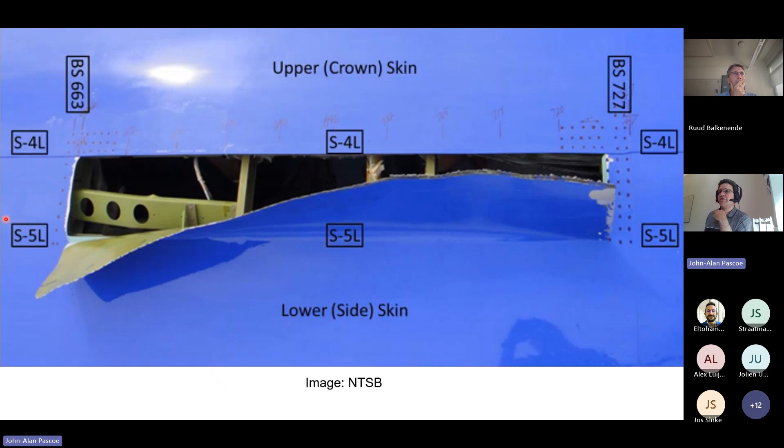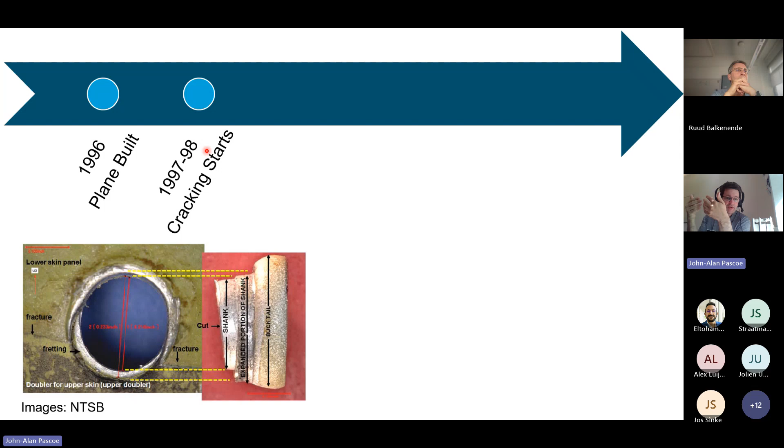The stresses were not distributed correctly, and so very soon, about a year or so after the plane was built, the material started to crack due to these increased stresses. We have a phenomenon called fatigue. If we have repeated loading on a piece of material, that can start to damage, and that damage grows over time. It's quite a slow process because it took another 12, 13 years before finally the crack got large enough that the remaining material could no longer carry the loads, and this entire piece of fuselage just unzipped and let out all the air.

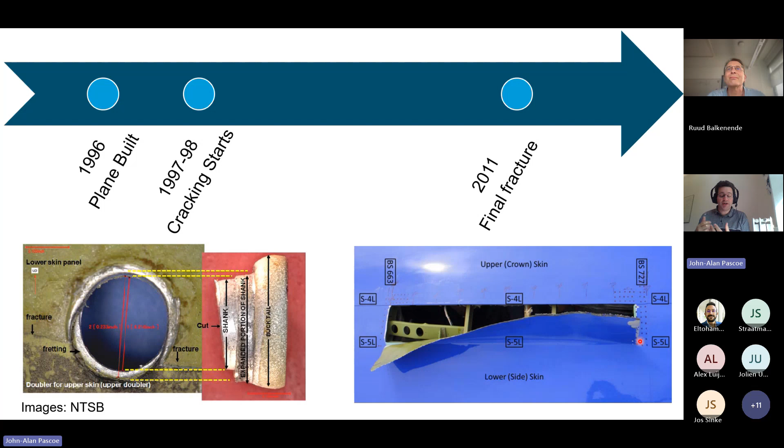So obviously this is something we want to avoid, this phenomenon of fatigue. It can happen if you incorrectly manufacture your plane, but even if you perfectly manufacture your plane, you could still have issues with fatigue. So one thing is, if you want to have a plane that lasts long enough, or lasts forever, you need to design it against fatigue. One thing you could do is characterize the fatigue properties of your material.

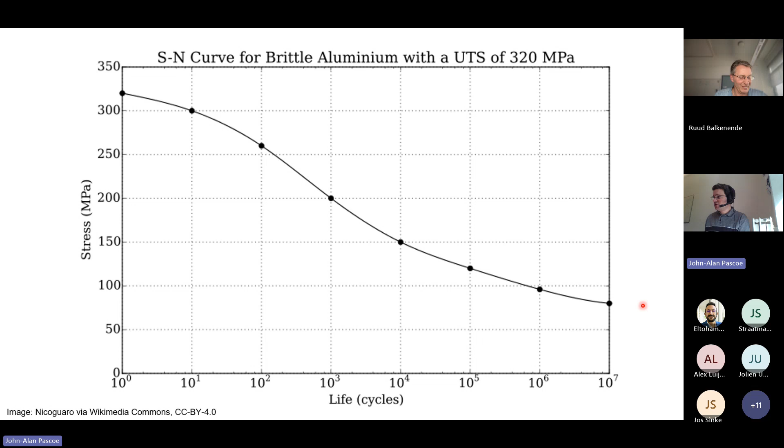So if you look at this curve, it starts over here. This is what we call the tensile strength of the material, where the material fails immediately, after even one cycle. But you see there's also kind of an asymptotic behavior. So you could say, okay, that's great, we seem to have this kind of lower limit here. So if we just keep our stresses in our material below this level, then we would have an infinite life, and we could just use our plane forever.

So great, why don't we do that? Well, there's an issue. If we want to have an infinite life, we need to keep our stress quite low. And what does keeping stress low mean? How do we achieve that? It means we need to use more material. If we have more material, we can distribute the loads over more material, and that means the amount of stress, the load per unit of material, is less. So the material is less highly loaded, and therefore we have an infinite life.

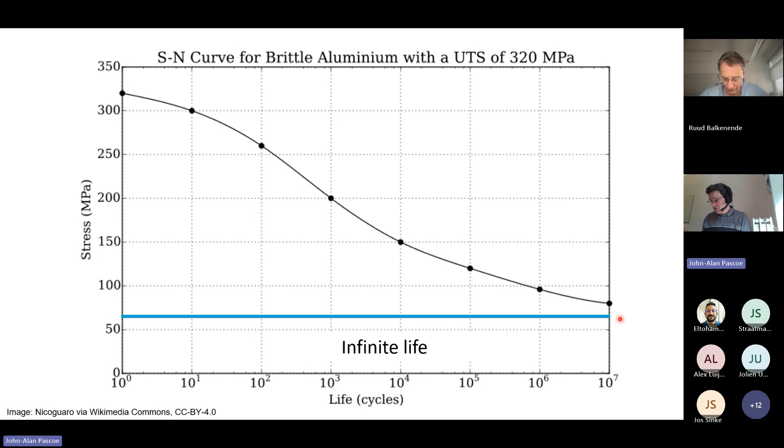So to get an infinite life, we need to use a lot of material. And to use a lot of material means a lot of weight that we have to add to our structure. Why is that a problem? Well, that is because of physics.

I'm going to have some equations here for those of you who like equations. For those of you who don't, feel free to zone out for a minute and I'll explain the key things you need to take from the equations at the end.

If we look at an aircraft in flight, there are four fundamental forces. There's thrust moving the plane forward, opposed by drag. Thrust we get at the moment by burning fossil fuels. The plane is kept up by lift, which counteracts the weight. If we're flying straight and level, lift has to equal weight to keep everything in balance according to Newton's laws.

For the lift, we have the following equation. The lift depends on the lift coefficient, which depends on the design of the wing and the angle at which the wing is with respect to the air. It depends on the air density, which is a function of altitude, the speed we're flying at, and the surface area of the wing.

If we have a certain wing design and we're flying at a certain speed, the pilot will adjust the angle of the plane to get the right lift coefficient to keep everything in balance. What is the right lift coefficient? You can solve this equation. The key thing to remember is, if we're flying at a certain height and speed with a certain plane with a certain wing area, the lift coefficient will depend on the weight. So the heavier the plane, the higher the lift coefficient.

The reason that's a problem is because we also have drag. Drag is what causes us to burn fuel, because if there was no drag, we wouldn't have to burn fuel to go forward. The drag has a similar equation to lift, but now we have this value of CD, the so-called drag coefficient. If we look at the equation, the drag coefficient is a function of the lift coefficient. One aspect of drag is the parasitic drag, which is always there. Another aspect is the induced drag, which is a byproduct of the lift we need to generate.

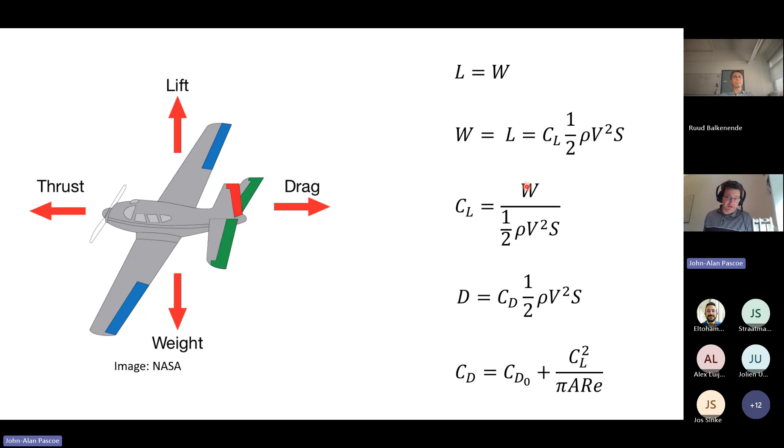So the drag coefficient is a function of the lift coefficient, but the lift coefficient is a function of the weight. The key point to remember is: if we have more weight, we need more lift. If we need more lift, we get more drag. And if we have more drag, we need to supply more energy to get from A to B. So the heavier the plane, the more energy it takes to get from A to B. And that means we're generating more fossil fuel emissions and more environmental impact from extracting whatever we're using as fuel. So we want to avoid weight from a cost point of view, but also environmental impact - a lighter aircraft, all else being equal, is more environmentally friendly.

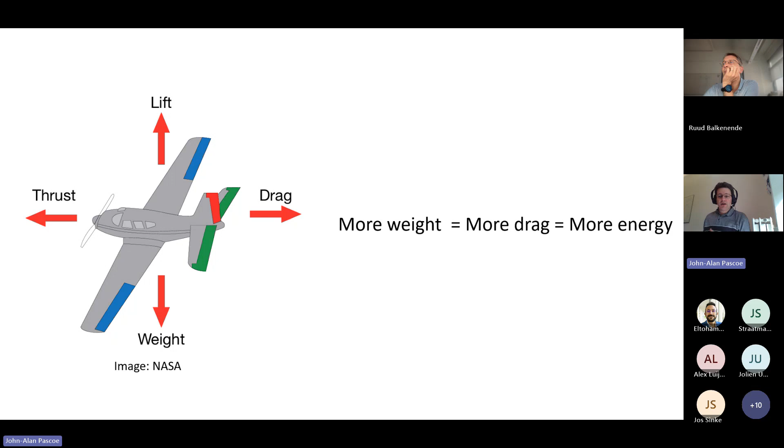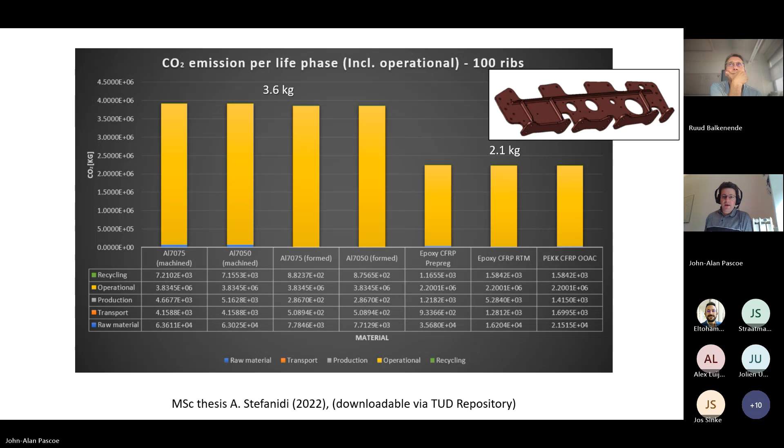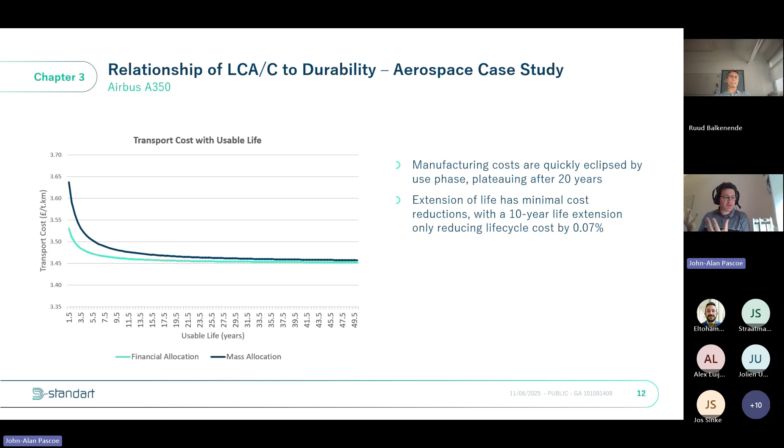Then you might think, okay, that's now where we're burning fossil fuels, but people are working hard at generating alternative fuels, zero emission fuels. In future we may fly on electricity, sustainable aviation fuels, or liquid hydrogen - they don't emit CO2. Then the story will change, because the operational impact will be low since there's no CO2. So should we then really focus on the manufacturing? Or maybe it's okay to be a bit heavier if that gives us less manufacturing impact. Well, that would be great if it were true.

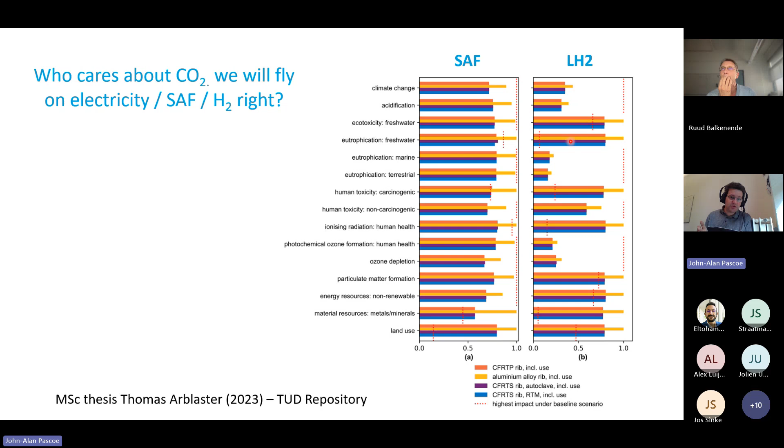On the left, you see if we fly on sustainable aviation fuels. On the right, if we fly on liquid hydrogen. And the key thing is that this yellow bar is still higher, right? So even so, the heavier solution still has in nearly all categories a higher impact than the lighter solution. So even if we fly on sustainable aviation fuels or liquid hydrogen, the life cycle impact is still dominated by the use phase, and the key driver for how much impact we have during the use phase is the mass. So even if we switch away from fossil fuels, from a life cycle point of view, having a lower mass is better, even at the cost of an increased manufacturing impact.

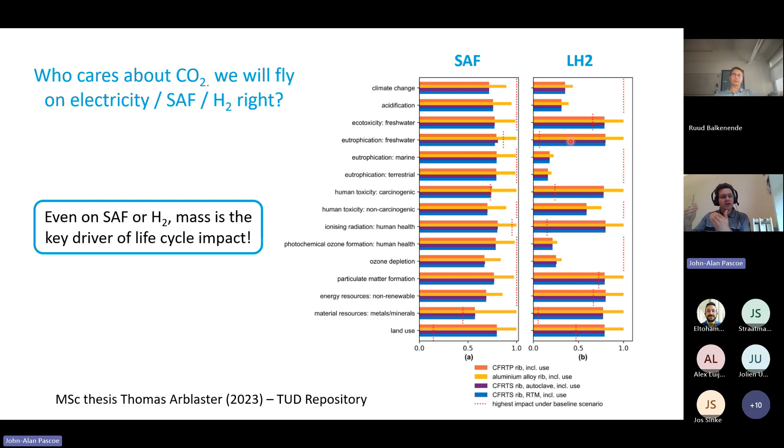So flipping that around, if we can reduce the manufacturing impact, or increase the recyclability, but at the cost of extra mass, that is probably not worth it for an aircraft. Which is very different from many other product categories where you say, well, maybe we can accept a little bit more operational impact if it makes recyclability better. But in aircraft, really, the operational impact is paramount.

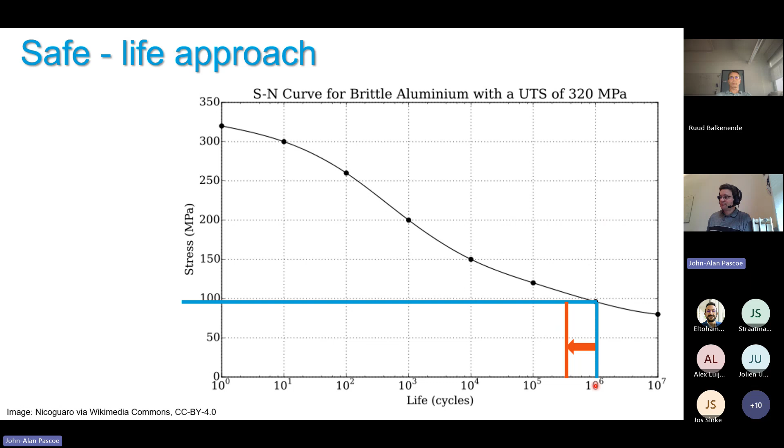So what do we do in an aircraft, right? To keep that mass down, we accept a limited lifetime. Going all the way to infinite life is not good - it would be too heavy. We can reduce the weight if we allow a bit more stress. If we say, well, let's allow 100 megapascals in this example, then we will have a fixed lifetime. We divide that by 3, and then we get what's called the safe life, which essentially becomes a use-by date for our aircraft or our part.

We say, okay, our plane, after so many flights, you scrap it. We can't keep using it because we cannot guarantee that it is safe, that it will not fail due to fatigue. We just scrap it. So there's a trade-off between having a lower operational cost or impact because we now have a lighter plane, so we can fly more efficiently, but at the cost of now having a limited lifetime.

Now, one issue with this approach is that if you look at this graph, it tells you nothing about what happens to the material during this lifetime. It just tells you at this point we get failure, but we don't know what happens before. And we know we have a large scatter, a large uncertainty, but we cannot with this information tell if we can keep using the plane or not. We cannot inspect the plane and say, oh, this is about to fail, or we can safely keep flying. So actually in aviation, for many cases, we've switched to a different approach, the so-called damage tolerance approach.

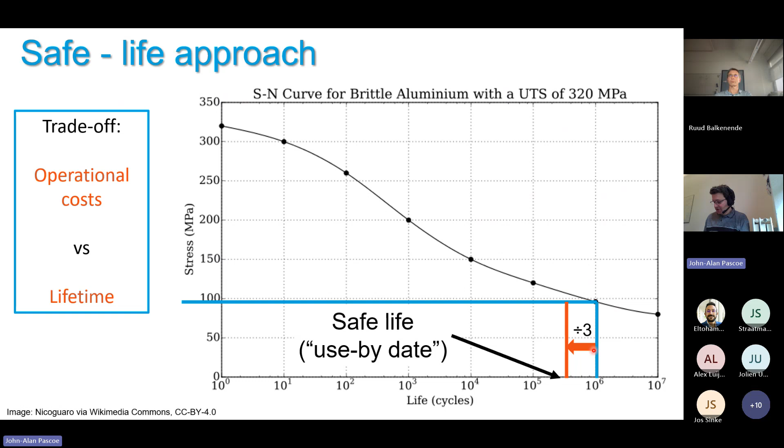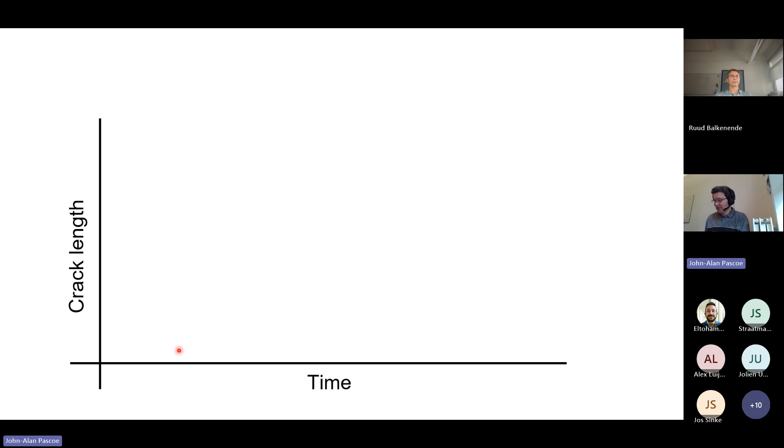What is the idea there? Well, fatigue, as I explained to you, is a result of cracks that slowly grow over time. And so if we can predict or measure how the cracks will grow over time, then we can say, well, at a certain point in time, the cracks are large enough to be detectable. We can find them during an inspection. And sometime later, the cracks will become so large that the plane can no longer carry the required loads - that the residual strength of the plane is too low, and then our structure fails.

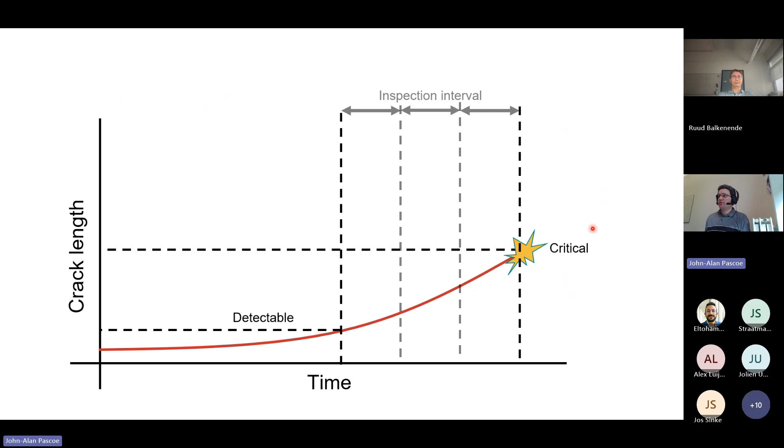Or at least there's a danger of failing. So that means we have a certain time window between when we can find a crack and when the crack is really a safety issue. If we divide that up into typically 3 inspection intervals, we can say, well, if we inspect the plane every so often, then we have 3 chances to find the crack. So even if one time the inspections on Friday afternoon and the inspector was rushed because he or she wanted to get home early, still there are 2 more chances to find the crack, and the crack will be larger.

So in this way, we can ensure that we always find a crack before it's critical. So instead of a use-by date, we go to an inspect-by date. It's a bit like what they now advocate in the Netherlands: if the use-by date on your milk or yogurt has passed, don't throw it away immediately, but smell or carefully taste or have a look—maybe it's still good.

Same with the plane. We can inspect. If we don't find any cracks, we can assume the plane is still good. We can keep flying until the next inspection, and potentially keep flying forever—or at least until we find cracks, and then we need to take some action. So that's the so-called damage tolerance approach.

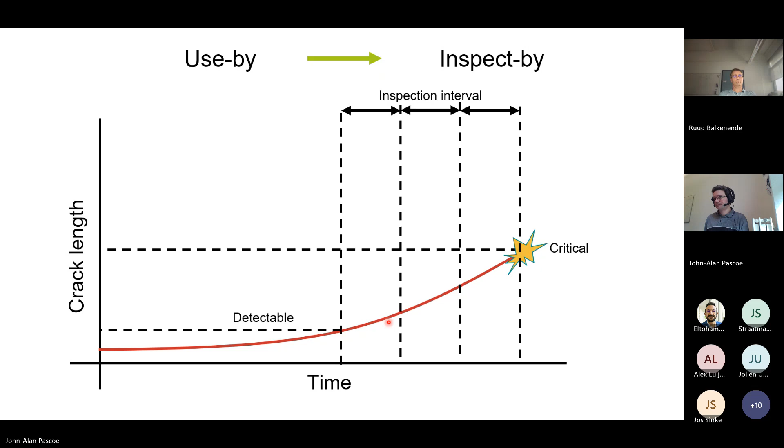Unfortunately, this also has its limitations, as shown by this very famous incident, the Aloha Airlines accident in 1988. A Boeing 737—and even those of you not so familiar with aircraft may realize there's a part missing over here. This is in fact a large chunk of the fuselage that flew off during the flight.

Unfortunately, one person did not survive. There was a flight attendant walking through the cabin at the time who got sucked overboard. Everybody else was in their seat with their seatbelt fastened, and so they managed to survive safely.

This was investigated to understand what happened, and it was found this was a very heavily used aircraft—35,000 flight hours over almost 90,000 flights, because it was used for flying between islands in Hawaii, so very short flights, lots of flights in a short amount of time, in a very corrosive environment—warm, humid, salty. It was found there was a failure of a longitudinal riveted and bonded lap joint.

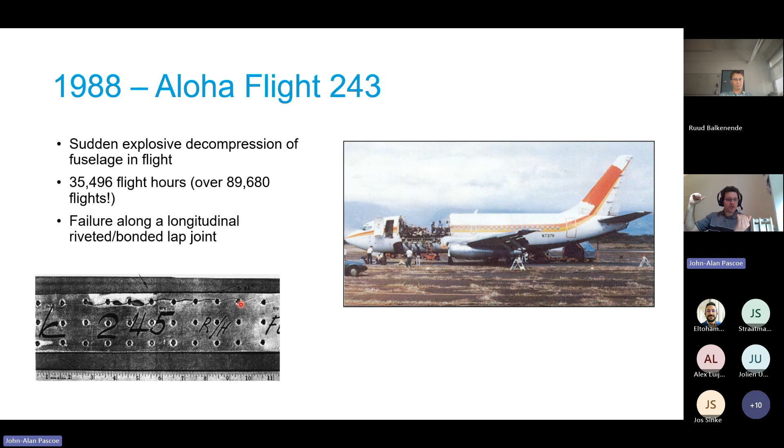Along this fuselage barrel, it's made of overlapping panels. At one of the joints where the panels overlapped, they found a collection of cracks joining together all these rivet holes and then just unzipping the whole joint. As people investigated further, they realized there's this phenomenon called multiple site damage, MSD.

What happens is you have these small cracks, but they don't grow independent from each other. If you have a location with multiple holes, you might have multiple cracks starting, one at each hole. But as they grow towards each other, they start influencing each other, interacting, and can even link up. So you can go from two relatively short cracks to one. Here you have a crack going from here to here, relatively short. But at the next stage, you have a crack going from here to here, all in one go.

Your crack very rapidly gets much larger. That means this damage tolerance approach doesn't work, because the small crack may be too small to detect easily, but as soon as it links up, you suddenly have this jump in crack length. You cannot inspect in that small time interval before the crack links up. So that limits the damage tolerance approach.

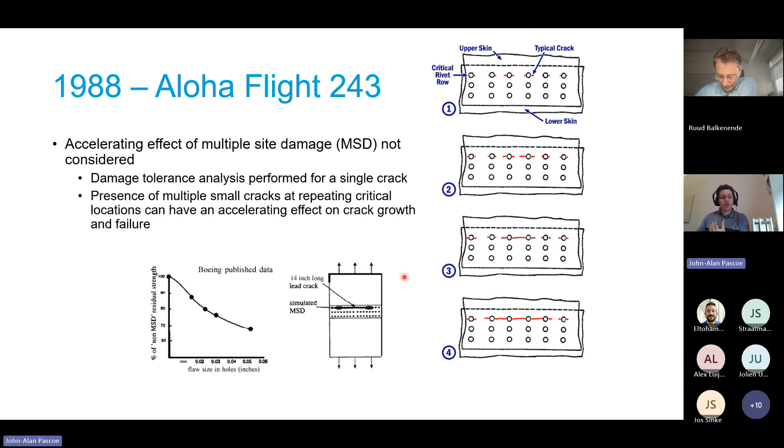Therefore, if you look in the regulations—this is one of the European regulations—there's a section on damage tolerance and fatigue evaluation in structures. One aspect states that a limit of validity must be established that corresponds to the period of time for which it has been demonstrated, by full-scale fatigue test evidence, that widespread fatigue damage will not occur in the airplane structure.

A full-scale fatigue test means literally building an entire plane, putting it in a huge test setup, applying loads, and seeing when it fails. Based on that, you establish a limit of validity. This means you have a certain amount of evidence from your full-scale fatigue test that you do not have to worry about widespread fatigue damage or multiple site damage for a certain period of time. That evidence has a limit of validity.

Beyond that, the evidence is no longer valid—you do not know what will happen. And what that means is that when you reach the limit of validity of your evidence, you have to stop flying. It is not allowed by the regulations to continue flying after the end of the limit of validity.

If you want to keep flying, you have to first extend your limit of validity, which means doing additional experiments and tests to prove you can extend it. Maybe you also have to do some modifications to your aircraft, or repairs or reinforcements. But if you do not put in the work to extend your limit of validity, you have to stop flying.

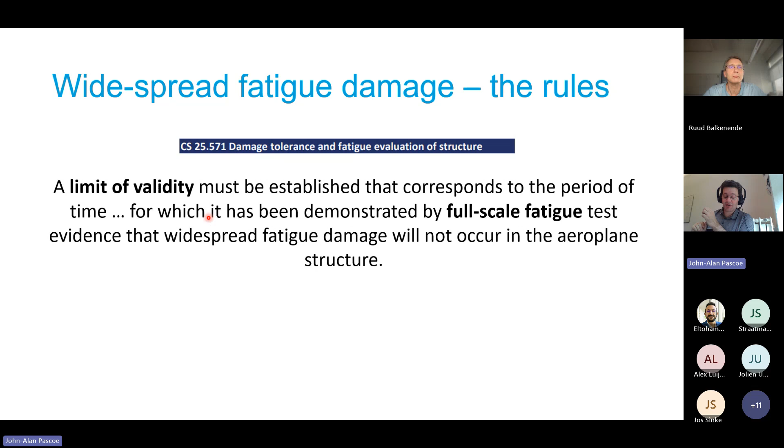That may sound like a term that comes up in discussions of circularity, which is planned obsolescence. This is in effect what the regulations say: you have to establish a hard limit on the lifetime of your aircraft. Beyond that point, you are not allowed to keep flying, period. And that's not for economical reasons to make people money, it is a safety matter. We cannot fly beyond this point because we cannot guarantee that the plane will remain safe. So that's a fundamental tension if you want to apply the circularity concept of using things as long as possible. There are real physical safety reasons why that is hard to do for an aircraft.

Unless you're able to keep stretching your limit of validity, that is something you could do. You could say, well, I could keep investing in extending my limit of validity ahead of how I'm flying. But still, at some point you might reach a point where you need so many modifications to your structure to avoid widespread fatigue damage that it becomes very expensive. And the other thing you could ask is, we've seen before that the impact of the use phase is so much higher than the impact of the manufacturing phase. Is it really better to keep flying a plane for 40 years, or would it be better to replace a plane every 10 years if that means you get improvements in technology giving you lower environmental impacts? I'm not saying one or the other, but that's something you really have to look at from a systemic and life cycle point of view to understand what would be better.

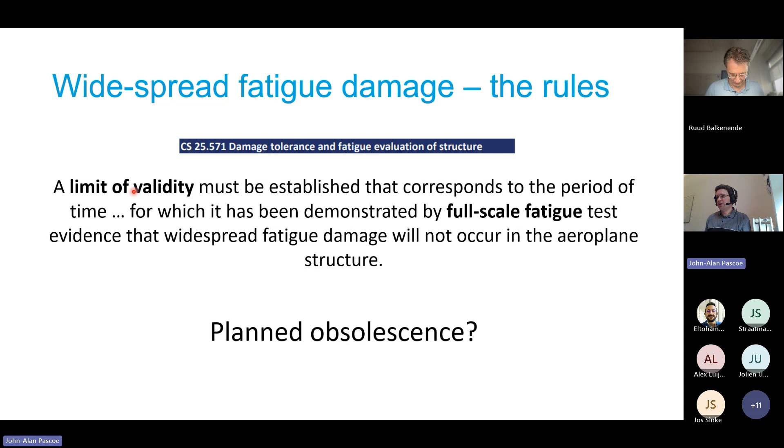So that is the prevention part of the pyramid, or the R ladder. Key points to remember: the life cycle impact of an aircraft is driven by its mass. The higher the mass of the aircraft, the more energy it will take to fly, and the higher the life cycle impact will be. So typically, if we want to fly longer, all things being equal, we need to make the plane heavier so we can keep the stresses lower and slow down this fatigue process. And safety, needing to guarantee that the plane will not fail due to fatigue, leads in effect to planned obsolescence, and that's even written into the regulations for aircraft.

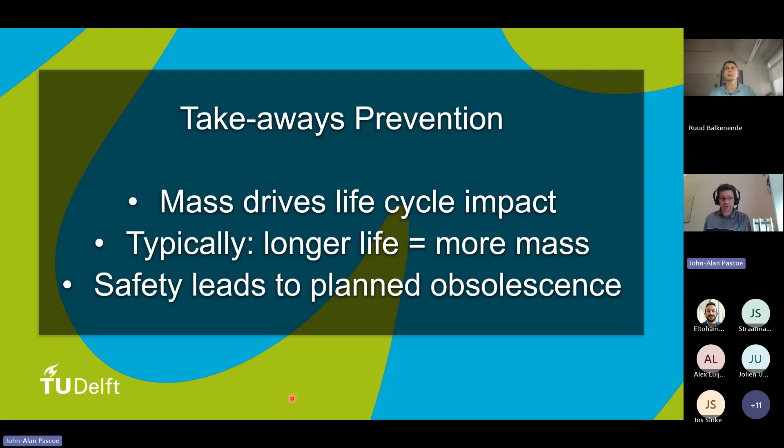Jos, do you have a question? Maybe that was an accidental unmute then.

All right, so that was prevention. We've seen, okay, we cannot use a plane forever. You're muted now, John. Yeah, I should be unmuted again.

So the next step, if we move down the ladder — if we can't prevent that we need to dispose of the plane — well then, can we reuse? And this is actually where the aviation industry does a really good job. I don't want to be only negative today.

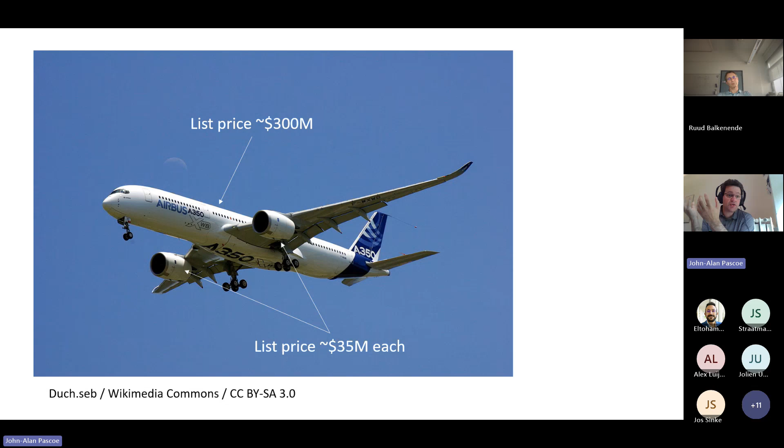And why is that? Well, for various reasons. One is that planes are expensive, but so are the parts of planes. For example, this is an Airbus A350, the list price is about 300 million. It's difficult to find exact numbers, but it's somewhere in that order of magnitude. The engines on this plane are 35 million each, so 70 million for the engines — about 20% of the price, or value, of the plane is in the engines. That means if you retire the plane, maybe the engines are still good and someone else might like to use them. And the same goes for many other parts.

If you look at landing gear, it's going to depend on the type of plane, how big and complex it is, but you're talking several million for a landing gear leg and the wheels. The auxiliary power unit, which is used to generate electricity when the engines are not running, 500,000.

And there are many other parts of the plane that all still have a lot of value. So even if the plane itself reaches the end of its life for whatever reason, which can also be for economical reasons or strategic fleet planning reasons, not necessarily fatigue or really structural reasons, there may be lots of parts on the plane that are still good and usable for other purposes.

What we also see is that plane families or series can have a long lifetime. Planes might be in production for 20, 30 years, which means you may be retiring the first plane of the production series while the last plane is still being delivered. That means there may be demand for spare parts, and instead of making new parts to use as spare parts, you can take those off older aircraft that you're decommissioning.

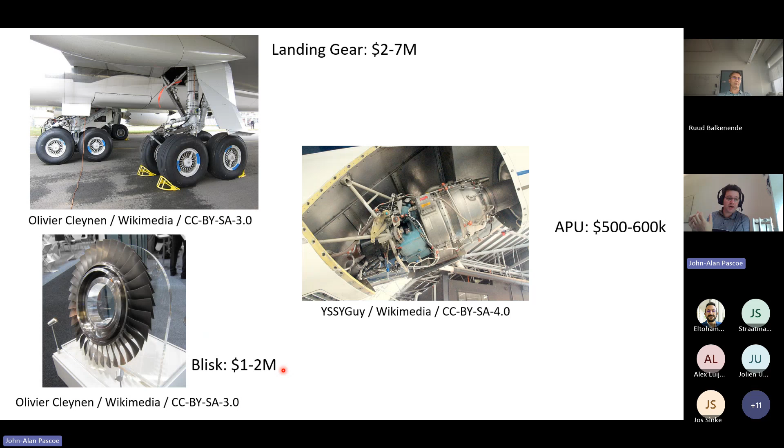There are a number of companies working on this. One example is AELS, in the Netherlands, located at Twente Airport - Aircraft End-of-Life Solutions. Maybe interesting to invite for a talk at some point. If you go to their website, you can see they have two main offerings: you can buy their parts, or you can sell your aircraft.

Because this is the business model: AELS buys old aircraft, takes out all the parts that are usable, and then sells those parts to people wanting spare parts. The fact that this is a successful commercial company shows that this is a business model that works - an economic model that works.

So there are two aspects to why this is possible. One is that we have these high value components that people want to use because there are still aircraft of that type flying around, or aircraft of similar types that use the same components.

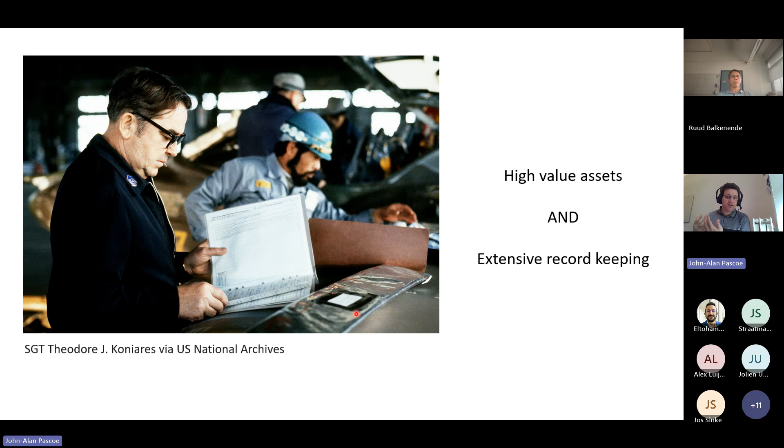Which helps set the stage for being able to reuse this part in a new situation, even in a very safety critical situation. If you look at the AELS website again, you can see there are many parts - pylons, pipes, oxygen bottles, lights, lavatories, landing gears, inlets, doors, ducts - many, many parts that you can buy that can all be given a new life after the decommissioning of the aircraft.

So in summary, reuse is something the aviation industry is really good at - maybe even an example for other industries. I'll give some numbers on how many components are used in a bit, but I think the reason why this is possible is that there is a large market for reuse.

So there are many people that want these spare parts, and we have a lot of high value assets. If it's a part that's worth $1 million, it's worth the effort to carefully dismantle it and take it off a plane and store it carefully. And these assets, these parts, are very well documented, so there's a lot of traceability that allows you to guarantee the quality of the part that you're getting.

Yes, it's of course second-hand, but you know exactly how much life is left. You know that nothing strange has happened to it during its lifetime, or if it has, that it's been repaired properly - all of that is available in the documentation. The documentation is also very important - if you lose the documentation, the part itself is also immediately worthless, and will even be scrapped to make sure that it's not counterfeited.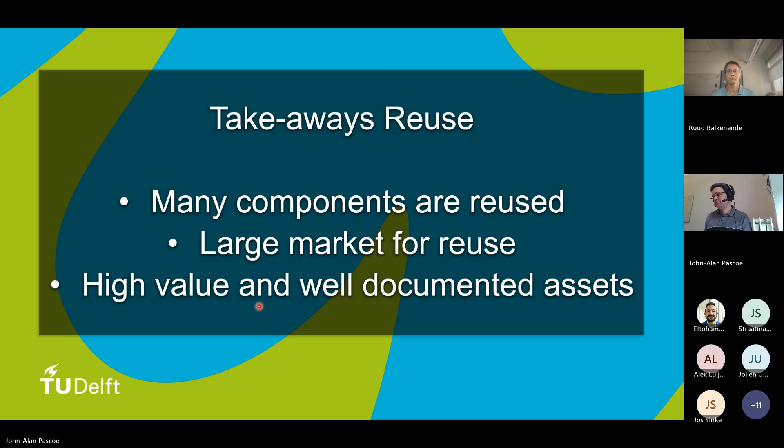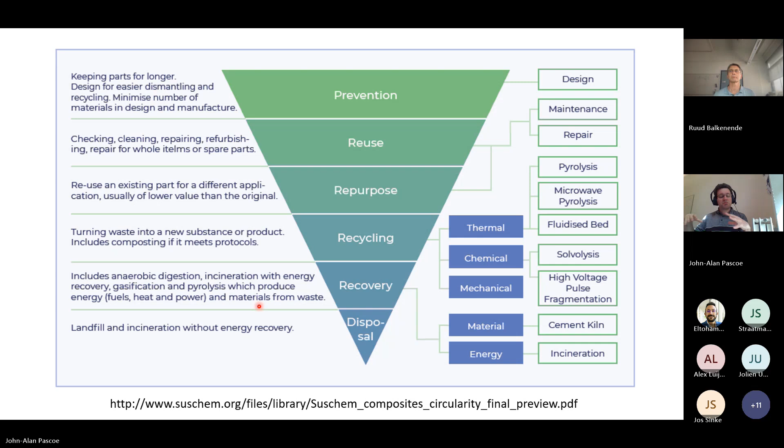And so that is why reuse is possible. But not everything can be reused. We've talked about components that can be reused, but the skeleton of the plane, the structure, that's not so easy to reuse. You can't just take a wing off one plane and put it on another.

So then we're left with the lower rung of our pyramid, which is recycling. And again, we come back to this point. We have here our boneyard. We've taken out the valuable components. What do we do now with the rest of the plane?

Now, you might say in theory, especially for current generation aircraft, they're made of aluminium. Aluminium is extremely recyclable - something like 75% of all the aluminium ever extracted from the earth is still in use because it's so recyclable. So in principle, recycling a plane is entirely possible. If it's an aluminium plane, chop it up, melt it down, reuse the aluminium. There are some challenges with that, which I'll come to. But one is especially, what do you want to do with the aluminium? Do you want to use it for beer cans, or do you want to use it for a plane again? And especially if you want to use it for a plane, we start to run into some challenges.

But before going into detail on that, just to give you some feeling for the study - there was a study already 20 years ago, a European project called Pamela, run by Airbus with various partners. They took an old Airbus aircraft, an A300, and spent 2 years step by step recycling it, finding what they could do with this plane. There were a couple of steps: they cleaned and decontaminated the plane, then thought about what they could extract and how to use it. They disassembled all kinds of parts, which via repair shops were then reused as spare parts in aircraft.

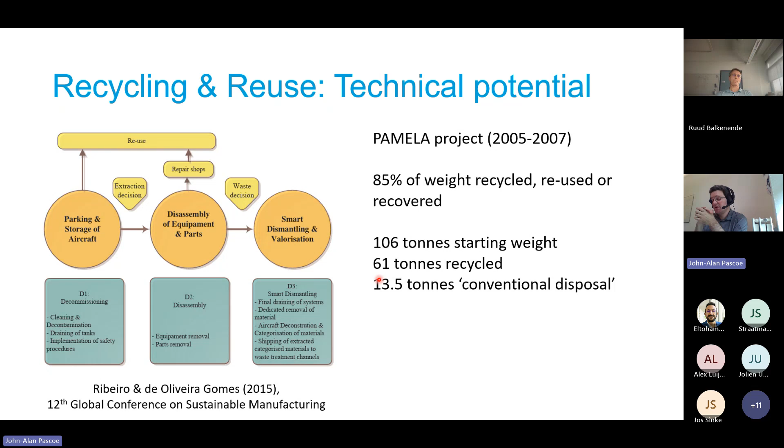So technically, it's very possible to recycle an aircraft. It's not a technological challenge. So why don't we just do it? Well, there are some other challenges: the classic one, contamination, the cost of dismantling, production volume, and certification.

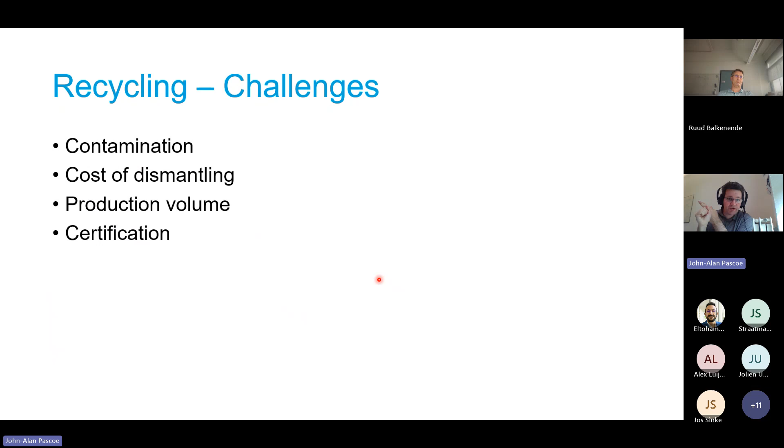So if you just put this plane through a very big shredder and have everything on a big pile, that's going to be very tricky to recycle, because you're mixing up all these materials. You can melt down the aluminium, but you can't melt down the carbon fiber - that will just burn. So if you want to recycle this, you need to separate out these materials, so you can treat each material individually properly without contaminating it.

Carbon fiber is becoming more and more important as a material in aircraft. The latest aircraft are 50% made of carbon fiber reinforced polymers, and those are much harder to recycle. You can't just melt them down. There are some recycling techniques, but they all have disadvantages, and it's very hard to really recover pure virgin material properties, unlike with metals. If you do your recycling carefully with metals and prevent contamination, you can get basically the same material back again.

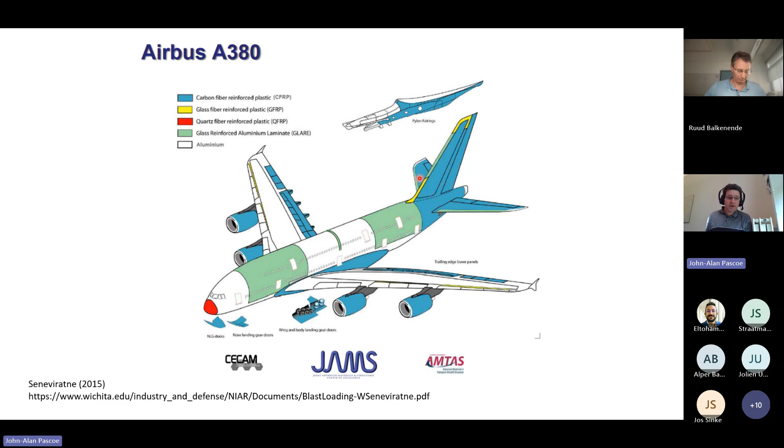But if we recycle this plane and just melt it all down in one go, then whatever comes out is some mix of these alloys. It's none of these alloys, so it doesn't have the properties of any of them, but it's some kind of weird in-between mix that probably we don't have a use for.

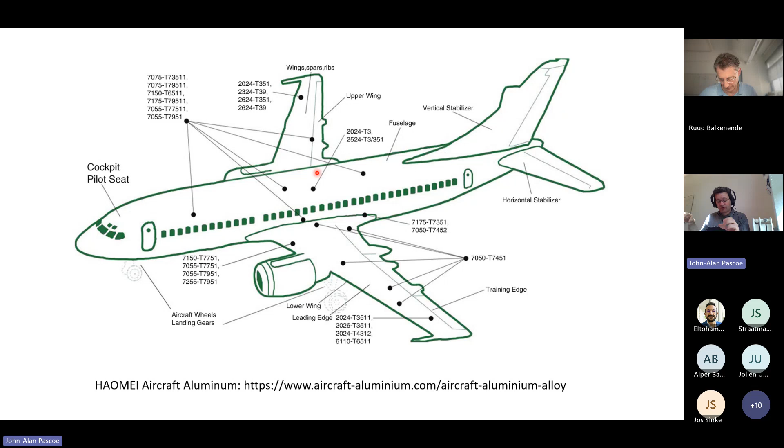There has been research into that, for example in the SUSTAINair project, where people looked into using techniques to find out what the structure is like. Because from the outside you see the skin, but inside we have all these reinforcing structures. So you need to take that into account when you're cutting up your structure for recycling. Maybe we want to cut along a joint or around the joint, or do we need to separate out the stringer or this rib or not. So you need to visualize that.

But in this way, you could, with a robotized solution, make a very neat cut along some of these joints and in principle separate out the panels. But it's going to be more effort and more work than if you just take your big crane and go.

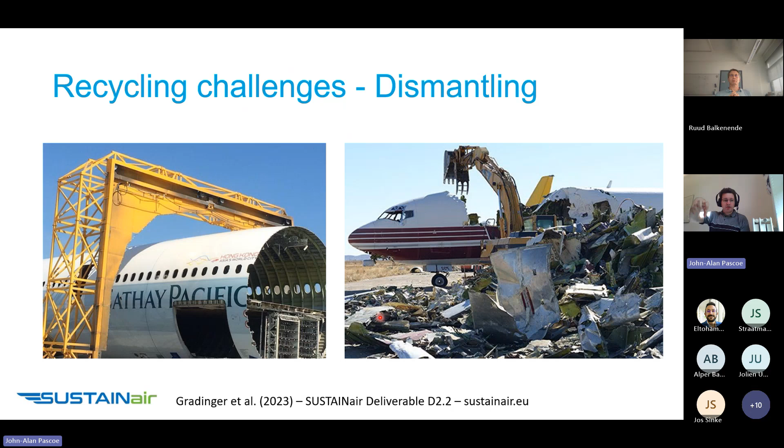So again, there's a challenge. And you might say, well, if we know we're joining all these different materials together, can we not make joints that are easier to dismantle, that you can just very easily screw apart, or that is more modular? Can we avoid things like welding, where we really join parts together in a way that's very difficult to separate?

In theory, yes, but that would add more mass to the aircraft. We saw before why we don't want to add more mass. So maybe there are things you can do in the design to improve recycling, and of course we should look into that. But as soon as the impact of that is that we add more mass to the aircraft, it's maybe not worthwhile to do.

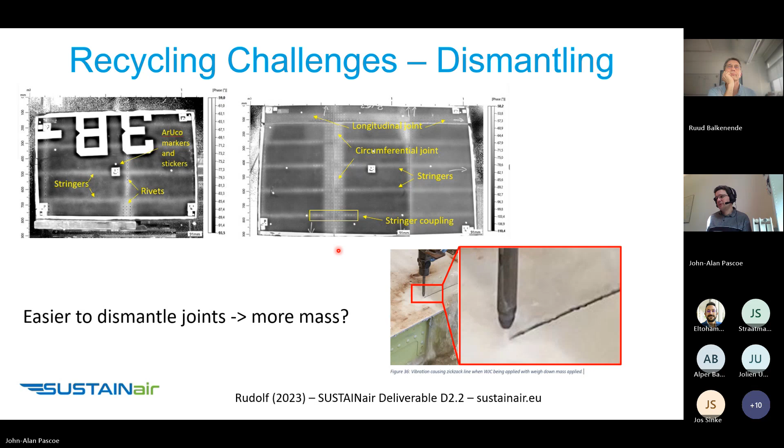Another challenge is the cost and the low volume. It's a bit hard to find numbers on this, but some things I've been told by people at AELS is that the cost of scrapping a plane is roughly equal to the value of that scrap, at least with current technologies and ways of sorting. So the only real reason to do it is because you need that space on your lot. If you are space constrained, like in the Netherlands, then it's worthwhile to at least get rid of the plane, even if it's break even.

But if you have a large tract of desert and you can just shove the plane in the corner and forget about it, then why bother to dismantle it? Why bother to recycle it?

There's also an issue with low volume. We have these very niche aluminium alloys used only for specific applications. The annual production of aluminium is about 72 million tons per year. I did a rough estimation: if we assume something like 500 to 700 aircraft being retired per year, which I think is a reasonable number at the moment, but other people may have better numbers on that - I see we have Ligeia from ATOS here, she may know, feel free to correct me - but as a very rough estimate, we are at 0.035 megatons per year. So this is a tiny fraction of the total aluminium market.

So if you want to buy aluminium, are you going to go to a lot of effort to try and recycle that small amount of aluminium, or do you say, forget about it, I just buy new because there's a massive market and this is too small to be worth worrying about to really invest in or see what we can do with that?

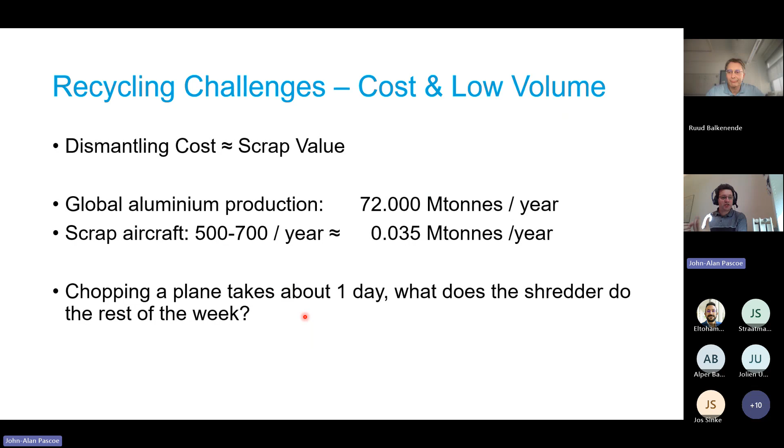Another issue is that dismantling, especially if you do the chopping up in a time efficient, and therefore cost efficient way - if you're a specialized company, you can shred a plane in a day. Great, but how many planes are you shredding every day? If you only have 2-3 planes a month that you're recycling, what is your shredder doing the rest of the month if it can shred those planes in 1 or 2 days? So you gain a lot of downtime and it becomes an economic issue. It's not interesting to invest in such shredding equipment if you can't be using it all the time.

A last challenge to recycling is certification. People often say, as a shortcut, okay, if we want to use materials on aircraft, they need to be certified. And then a challenge for recycling is, okay, if I recycle material, I need to certify the material. It's actually a bit of a misconception, because you cannot certify a material, at least not from an aviation point of view. What we certify in aviation are products - that is, the entire aircraft.

So what happens? The designer makes a certain design and says this design needs certain properties - certain strength, certain corrosion resistance, and so on. To achieve those properties, this specific material has to be used for this part. So they might say, for example, aluminium 2024 T3 needs to be used for this panel. And then they prove with calculations and tests that if you use that material, the part has the right properties. And this specification is very tight.

There's a document kept by, in this case, the Aluminium Association of America, I think it is - bodies that keep a standard that says Aluminium Alloy 2024 T3 means exactly this: this percentage plus or minus this amount of aluminium, this percentage plus or minus this amount of copper, and so on. So if I go to any aluminium supplier in the world and say I want aluminium 2024 T3, I can be pretty sure of what I'm getting, assuming they don't cheat. I know what properties it will have.

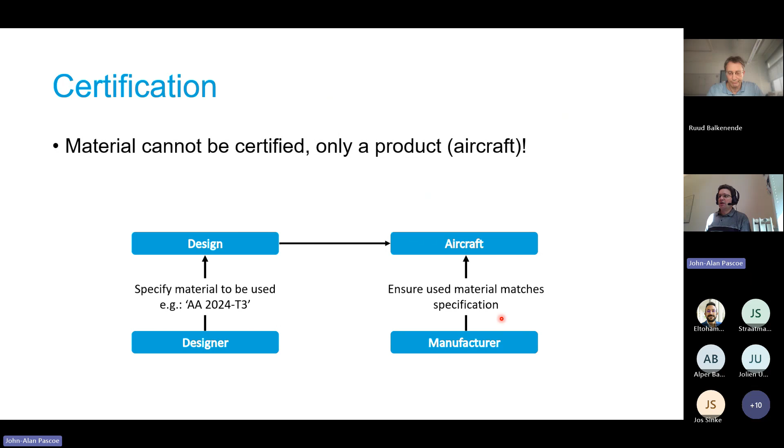Right? So how does that work then for recycling? Well, it means there are basically two routes for recycling. If you want to read this in more detail, you can look up this public deliverable from the SUSTAINair project. So if you want to recycle material and get it onto a certified aircraft, there are two routes. One is that you can recycle material to meet existing specifications.

So for aluminium alloys, for example, we have these AA codes. So if you can take an old plane, scrap it, recycle it, and then you get a block of aluminium out, and you can guarantee that the aluminium you get out of that recycling process meets the specification of aluminium 2024 T3, or whichever other one it is, then you can just sell it as that. And then it doesn't matter for this process whether this is virgin material that was bauxite two months ago, or if it's recycled from a plane.

As long as it meets the specification, you could use it. The other option, which is what you may need to move toward if we want to recycle composite materials, is you could create a new specification. Say, well, I can't get exactly this material that already exists, but I can make a new material from a recycled material, and I can specify that material. I can write all the properties that are of interest and say it will have this composition, it will have these properties, and I can guarantee that I get that every time within a certain bandwidth. Then you could specify your new material, and your designer could say, in this part, this panel should be made from recycled material XYZ, and that's specified, and again, that would be allowed from a certification point of view.

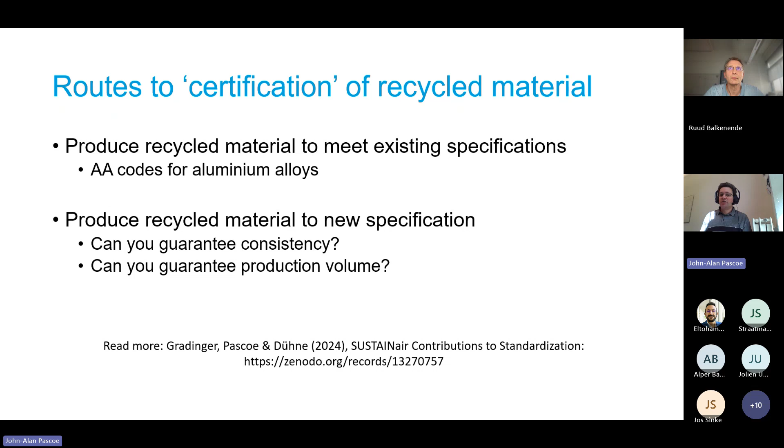So to summarize that, material recycling is technically feasible, especially for metal aircraft. We know how to do it. It's entirely possible, but there are a lot of economic challenges to actually doing that in practice. So maybe the solution there is technical. We say, well, we need better recycling techniques that bring down the cost of recycling, then it becomes economically feasible.

You could also look to regulatory solutions, where you have product liability mandates, where you say, okay, Airbus, if you make a plane, it's your responsibility that it's recycled properly, even if it's 50 years from now. Could be a solution. You just impose that people have to take on these costs. But the tricky thing with aircraft is they're very easy to fly from one part of the world to another. How do you ensure that people don't just fly the plane to Africa or South America or the US and then sell it there and say, oh, well, I sold it to this person in the US and it's their responsibility now, I can't control it anymore. That would be hard to enforce.

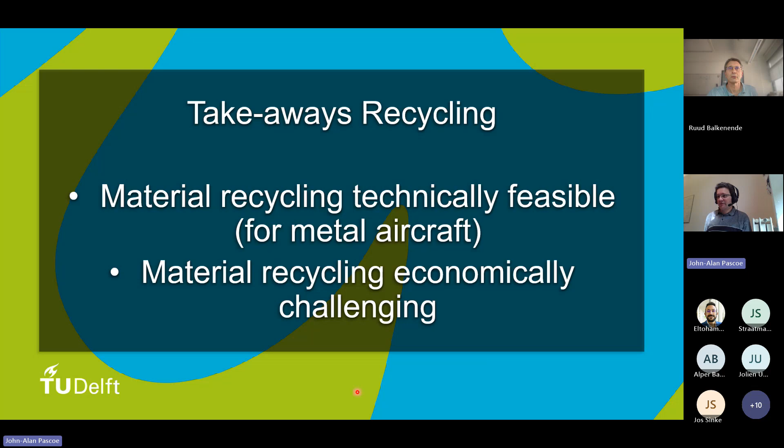All right, summing everything up, what are the main conclusions to take home with you? Achieving circularity in aviation is very challenging. I've shown you what some of those challenges are.

Contrary to many other sectors, we have an overwhelming impact of the use phase, of the fuel that we burn by flying aircraft around. And because of that, some of the rules of thumb for achieving circularity, like making the lifetime as long as possible, may not apply if you do a really systemic analysis of the aviation sector.

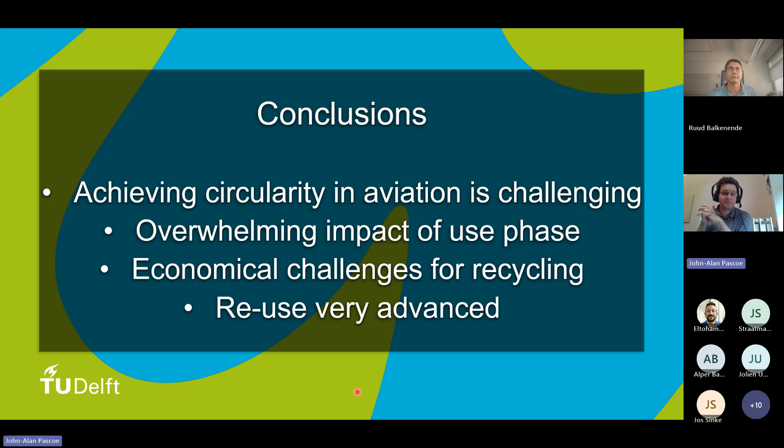Recycling is technically possible, but economically challenging. But to end on a positive note, in terms of reuse, the aviation sector is very advanced, and maybe there are things there that other sectors could draw inspiration from to improve circularity. And with that, thank you for your attention and open for any questions.

Thank you, John-Alan. Very nice illustration of how important it is to really look into the specifics of the context when it comes to circular strategies. Although I also see that there are, for instance, already similarities with things like washing machines and refrigerators, where you also do not want to design for as long a life as possible because of the use phase advantages that you get when you buy newer equipment. But we only have a few minutes left for questions because we have a hard end time at 11.

Zea, can I give you the word for the first question? I feel sorry for John-Alan.

Hi, Ruud. Thanks for the question. I just want to comment briefly and leave space to Gloria for her question, because indeed, nothing of what you, John-Alan, shared is conceptually wrong, but I really miss the connection to circular economy for a lot of the information, the facts you shared. I perhaps want to point that, especially your emphasis on the long life aspect, that's not per se wrong, or it will not be wrong to go to a limited life as a strategy. That was perhaps the remark. You gave a very good view of how the sector is now, but I really missed that link, and I think we should discuss this offline more, because I'm really curious.